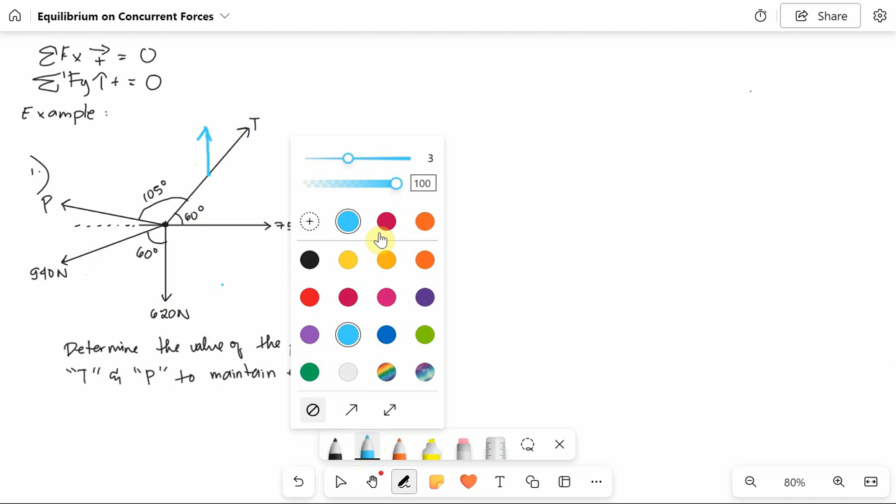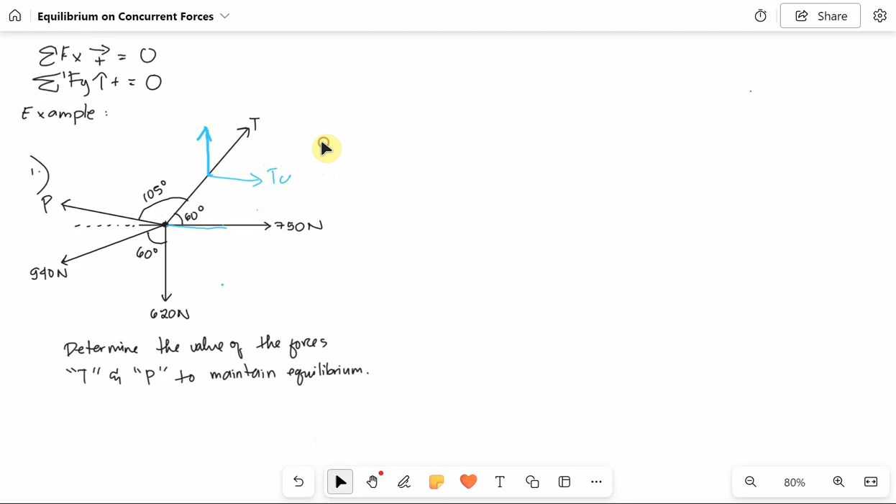So pwede nating kunin yung y component and x component ni T. So ang x component niya, ito yan, andito, adjacent side ni 60, kaya cosine 60, T cosine 60. And then ang vertical component niya dito, so opposite na 60, so T sine 60.

Okay, the next, yung P. Walang direktang given na angle sa P dito. Pero meron tayong given na angle na 105 and 60.

Kung knowing the total angle nito hanggang dito, that is 180 degrees straight line. And pag pinag-plus mo, 105 plus 60, that is 165. So ang total nito ay 165. And then ang remaining angle, kung 165, 180 minus 165, that is 15 degrees. So may 15 degrees tayo dito.

So pwede na natin kunin si y component and x component ni P. Ang y component ay opposite ni 15, so that is P sine 15. And then ito ang horizontal component ay adjacent side ni 15, so P cosine 15. And then last diagonal force, 940.

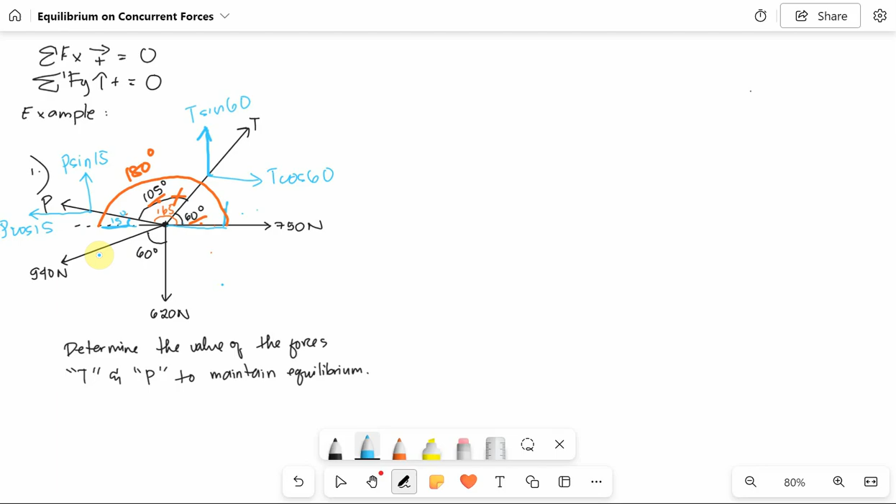So meron ulit tong y component and x component. Ang given sa kanya 60. Pero pwede mo rin makuha itong angle na to, which is 60. Ang total angle nito ay 90 degree, so 90 minus 60, that is 30. So any of the two reference, pwede nyong gamitin.

Pero this time, yung 60 na lang. So itong vertical component sa 60, ito yon, katabi niya, so cosine 60 yung vertical component, kung 60 yung reference natin. So 940 cosine 60. Kung yung 30 degrees naman yung ginawa natin, yung y component dito, opposite sa 30.

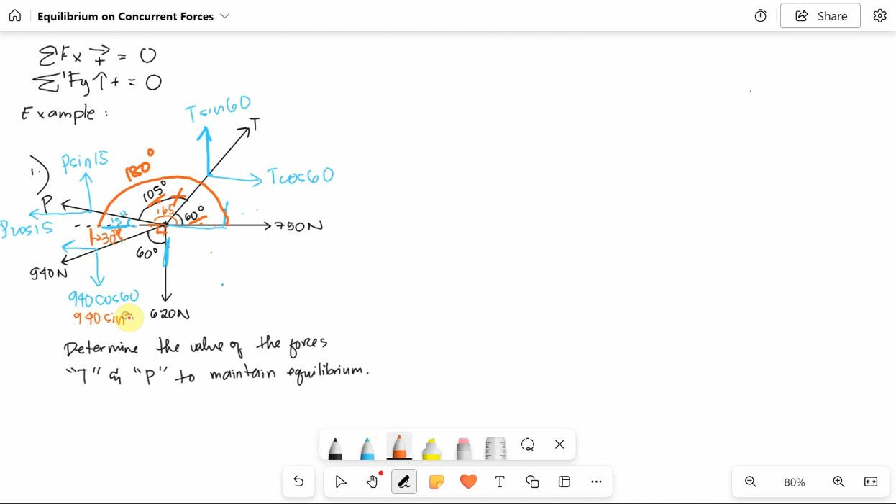So sine. Pwede mong gamitin 940 sine 30. So either of the two, pwede mo siyang gamitin. Pareha pa rin naman yung magiging sagot niyan.

So ito din, ang horizontal component ni 940 ay opposite ni 60. So ito yan, opposite ni 60. So 940 sine 60.

At again, kung gusto mong gamitin yung 30, adjacent side siya ni 30. Dito naman yung 30. Pwede ring 940 cosine 30, adjacent. So either of the two, pwede gamitin. So stick na lang tayo dun sa blue.

Okay, ayan. So ngayon, alam na natin mga component. Ang gagawin natin, ano na yan, summation na tayo. Mag-summation na tayo ng forces along x or along y. Depende sa inyo kung anong uunahin nyo. So unahin natin summation of forces along x.

We're going to the right is positive, is equal to 0. To maintain equilibrium, 0 dapat yan.

So unang summation of x, T cosine 60. Again, going to the right is positive, pag going to the left, negative. P cosine 15 minus P cosine 15. And then 940 sine 60 ay going to the left, that is negative 940 sine 60. And then meron pa isa.

Itong 750, again, walang component yan kasi nasa horizontal axis na yan. So horizontally na yan, going to the right, positive. And then 1, 2, 3, 4. Apat lang na going to x component. So yan na yun, equals to 0.

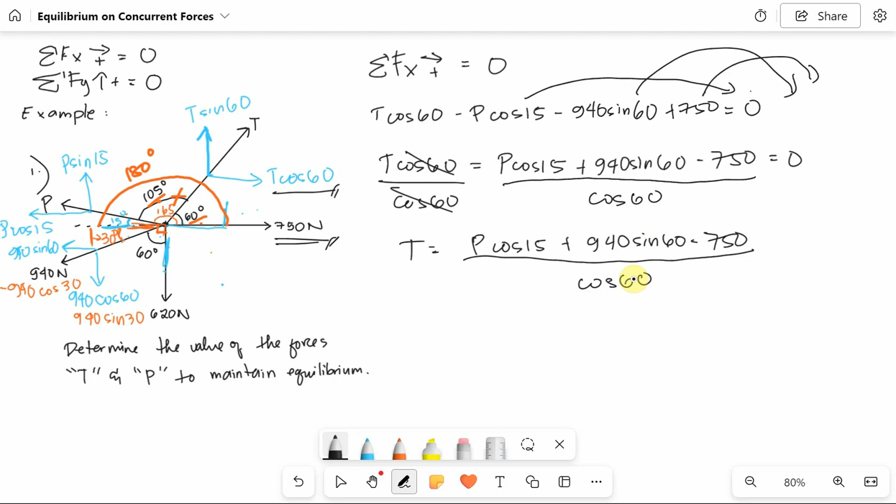Kasi nga, kukunin natin yung T. Now, T will be P cosine 15 plus 940 sine 60 minus 750, all over cosine 60. So kung gusto nyo i-simplify ito, pwede naman. O pwede natin i-store yan, sa calculator kung alam niyo i-store, para hindi mawala yung lahat ng value. So paano ba mag-store? So solve lang natin to.

940 sine 60 minus 750. That's the answer, right? 64.0638. So, do you want to store that?

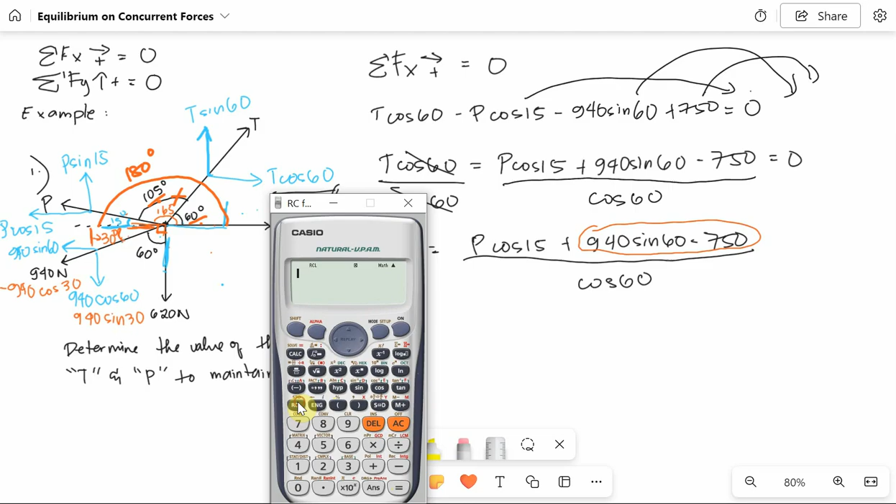So T, just to shorten the equation, no? P cosine 15 plus A - that's A, which we stored - over cosine 60.

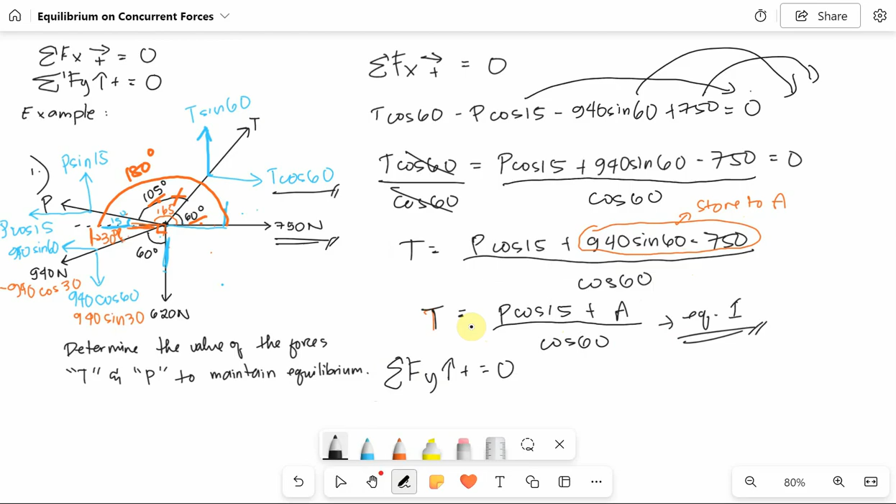Okay, next, summation of Y. So this is T sine 60, positive. T sine 60, then P sine 15, positive too, going up. P sine 15, going down, 940 cosine 60, that's minus. 940 cosine 60, and then 620, going down, minus 620 Newtons, equals 0.

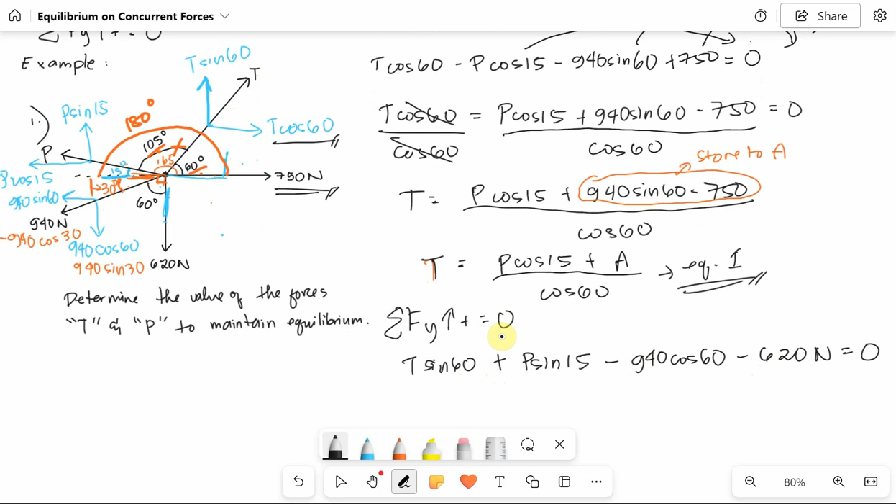And from this one, this is our equation 2. Equation 2. We can substitute equation 1 into equation 2.

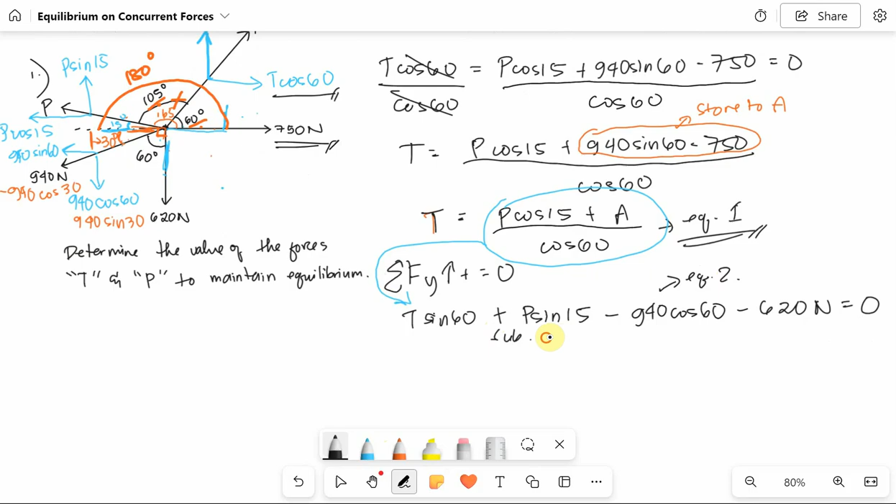So the whole T, we'll substitute here. There. Okay, so let's substitute there. Substitute equation 1 into equation 2.

So T is P cosine 15 plus A all over cosine 60, times - don't forget this, okay - times sine 60, plus this, P sine 15.

Then let's transpose these constants. So it equals, positive na siya - 940 cosine 60, then plus 620. Okay, and then can we factor out P here in the equation?

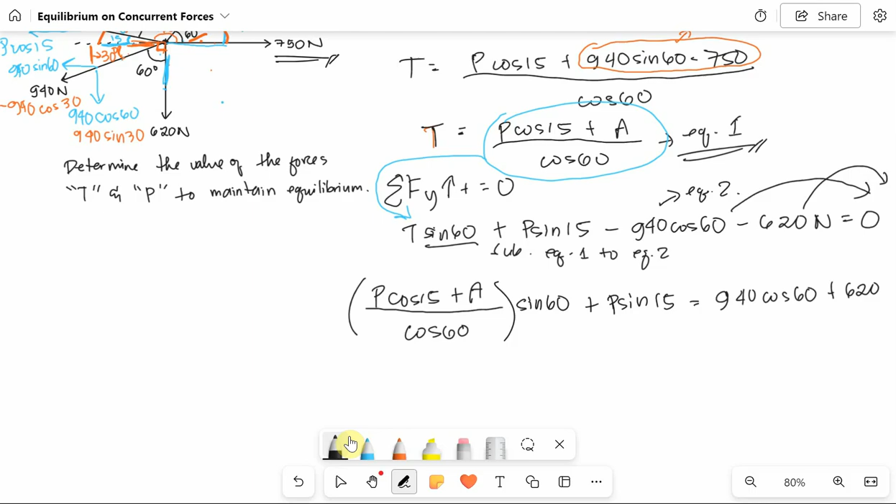change it first. We can distribute the sine 60. So P cosine 15 sine 60 plus A sine 60, all over cosine 60, plus P sine 15 equals 940 cosine 60 plus 620.

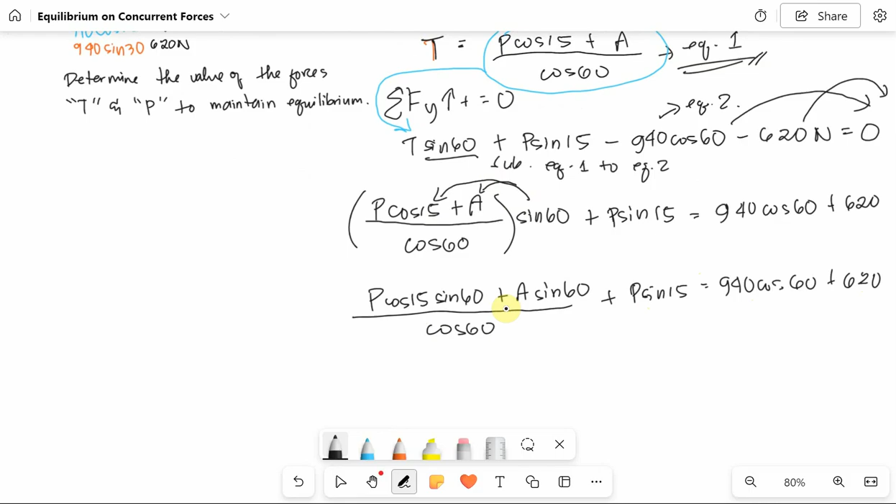Again, we still can't factor it out. What we'll do is evaluate these two fractions separately, so it becomes P cosine 15 sine 60 all over cosine 60, plus A sine 60 all over cosine 60.

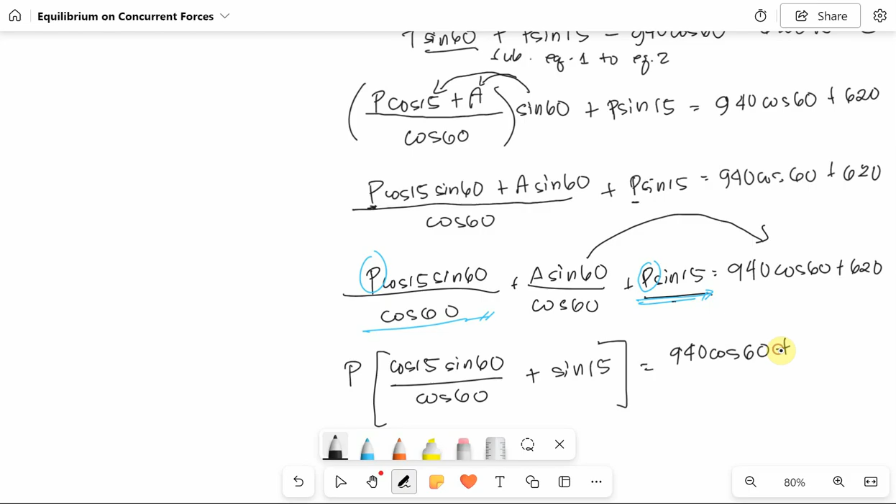Equals 940 cosine 60 plus 620, minus this - we transposed this - minus A sine 60 all over cosine 60.

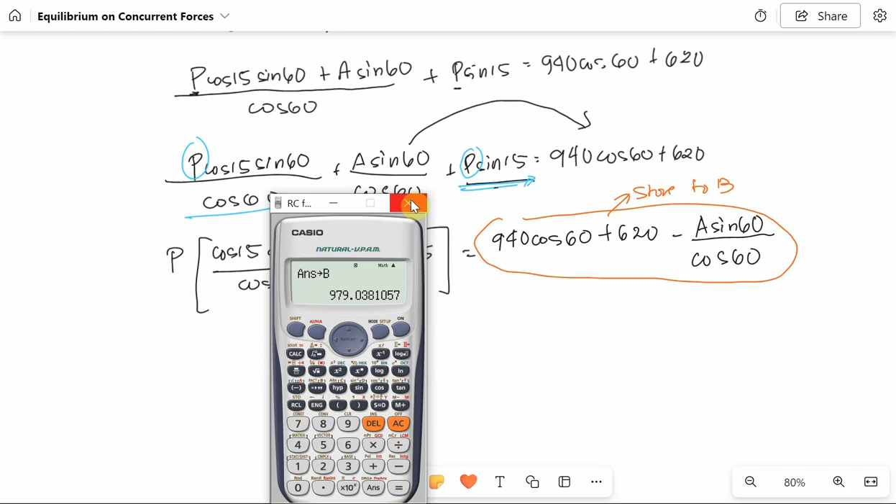So now for B, that's letter B. So divide both sides by this one to get P, right? So P will be equal to B.

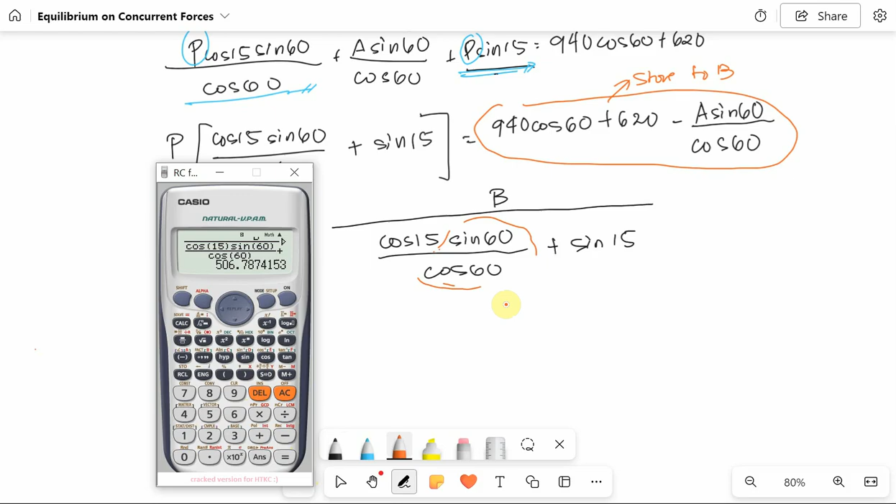506.7874. Tama ba? Yan, tama. So, ito na yung force P. Again, ang unit natin dito ay Newton naman lahat. So, Newton na rin ang unit natin ni force P.

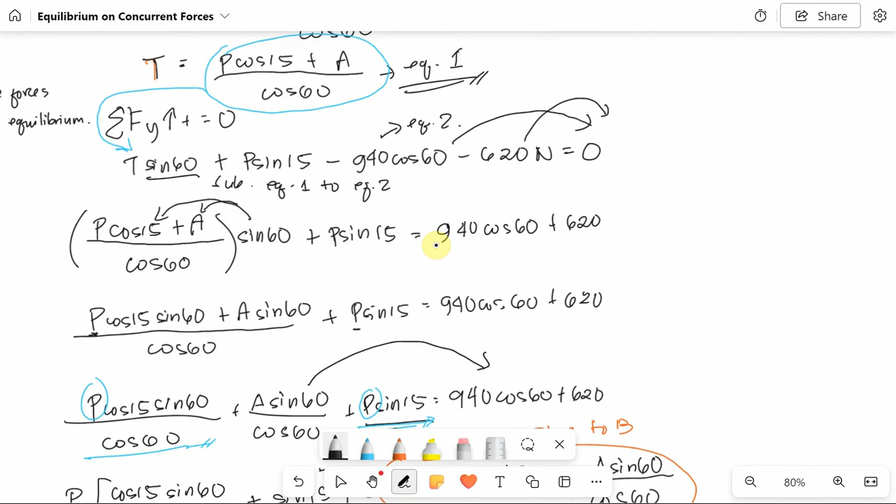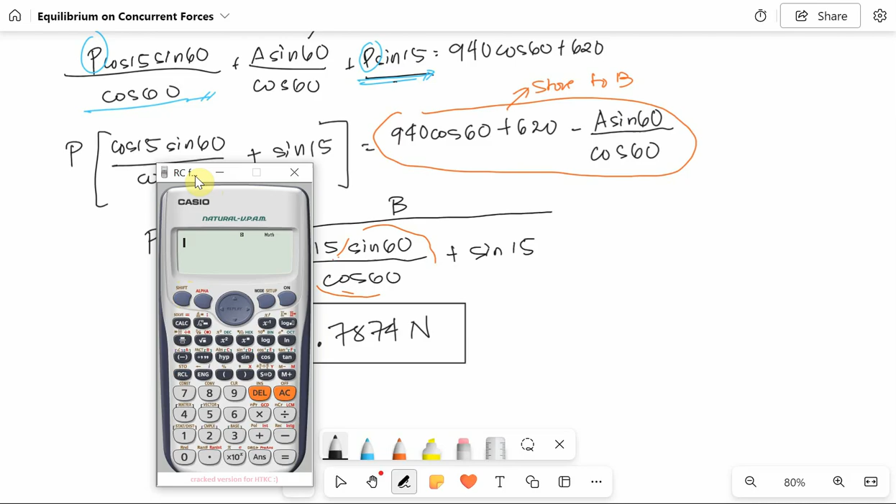Yan. Okay? Next, kailangan natin malaman si T. Knowing P, pwede rin natin i-store yan sa C, kasi isa-substitute natin. Store to C, A, B, C. Kasi kailangan natin yan, si P, para ma-solve si T.

Okay, so to solve T, using ito, formula natin, no? Cosine 15 plus A over cosine 60. Ito. Okay? So si P, in-store natin sa C. Cosine 15 plus A over cosine 60.

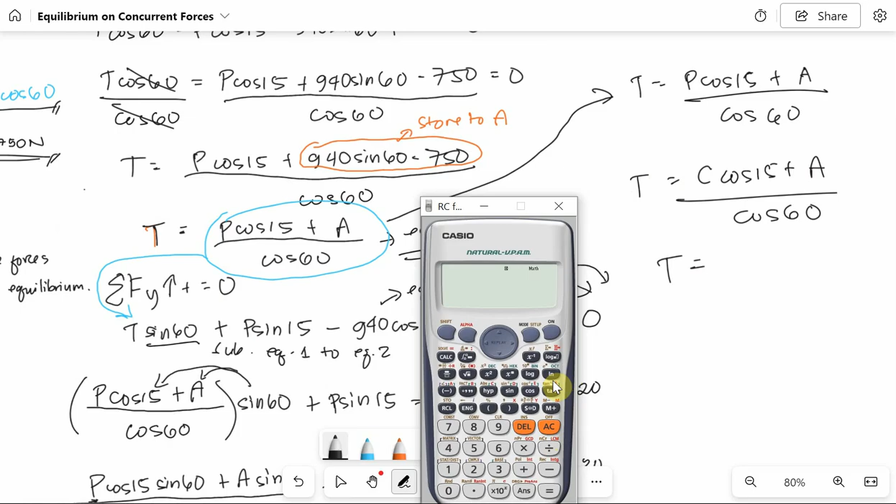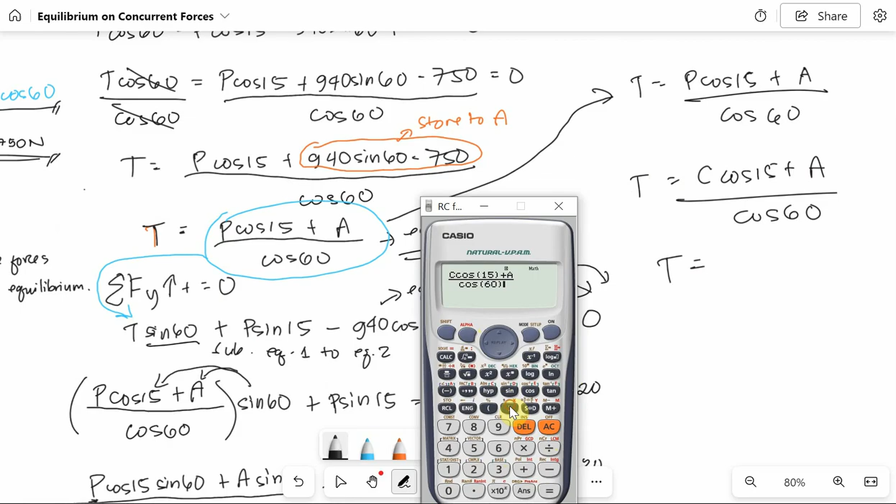So T will be, mas madaling buhay, no, kung na-i-store na. So sigurado ka pang tama. Again, kailangan lang din sigurado yung tama yung in-store mo sa calculator, no. C cosine 15 plus alpha A all over cosine 60. That would give us 1107.165859, or 1107.1659 Newton. Okay? Ayan.

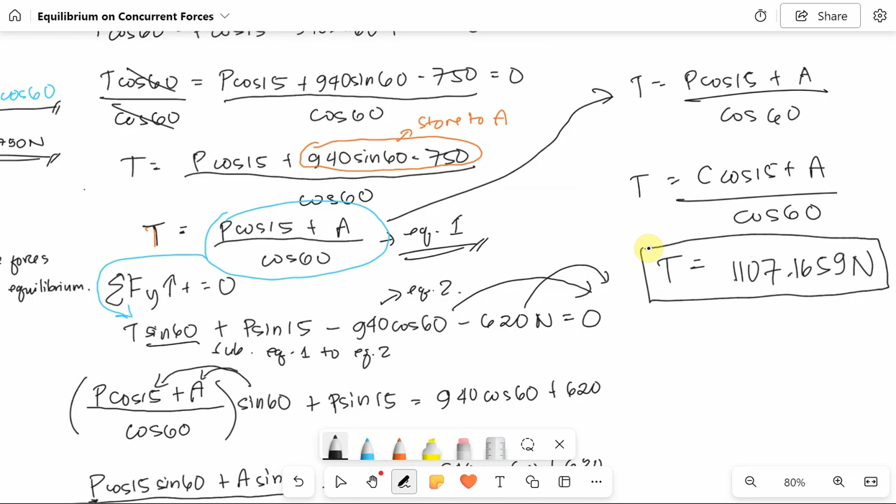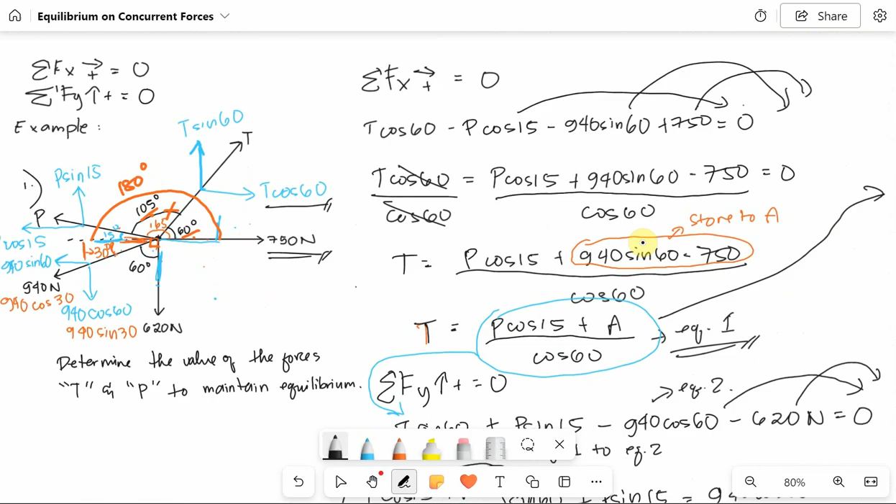Ayan. Ang tanong naman dito sa number 2, determine the force in each member and the weight, yung W na weight na to, of the block to hold the position shown. So meron tayo ditong tension, no? May ropes yan, ibig sabihin imagine nyo lang ropes yan. Tapos nakakonect siya dyan. So may 60 degrees, 30 degrees, 30 degrees, and A, B, C, D. Ito, 4 kilogram and the weight. Okay? So determine the force on each member.

Ano yung force on each member? Ito yan, member AB. So ito yung AB. Hindi natin alam. BC, hindi rin natin alam. And then CD, and then the weight. Okay? So again, concurrent force to, no?

Kung titignan nyo, merong dalawang concurrent force dyan. Kung hahatiin natin to, ito yung left side, section 1 sabihin natin, right side is section 2. So magdodrawing tayong FBD dito, which is ito yung concurrent na origin, no? Ito yung force, di ba? So that is a concurrent force sa section 1, and concurrent force din sa section 2, sa point C, force, di ba? So may tatlong force na nag-intersect sa isang origin. Okay? So paano natin sisimulan to, no?

Kung sa section 1 ba tayo o sa section 2? Dito sa section 2, yung weight hindi given, hindi natin alam. Sa CD, hindi rin natin alam. Si BC, hindi rin natin alam.

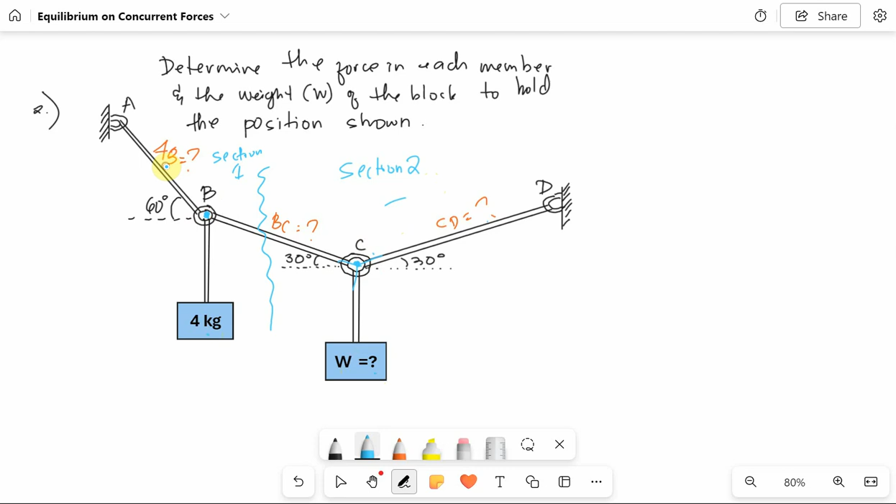Punta tayo sa section 1. Sa section 1, may given na 4 kg. Tapos hindi natin alam si AB, hindi natin alam si BC. So at least dito sa section 1, merong isang given, no? So mas maganda magsimula, syempre, sa may given kaysa sa tatlong wala kang given. Paano mo masosolve agad yun, no? Wala kang masosolve agad. So dito, dahil may given, pwede natin masolve agad. May masosolve tayo agad dito sa section 1.

Okay? Pero notice the weight, the given is 4 kg. So normally, ang weight or the force unit is in Newton. So ang gagawin natin, itong 4 kg, times natin sa 9.81, gravitational acceleration, para magkaroon ng weight. So pwede naman 4 times 9.81. Sa ilan ba yan? 4 times 9.81, that is 39.24.

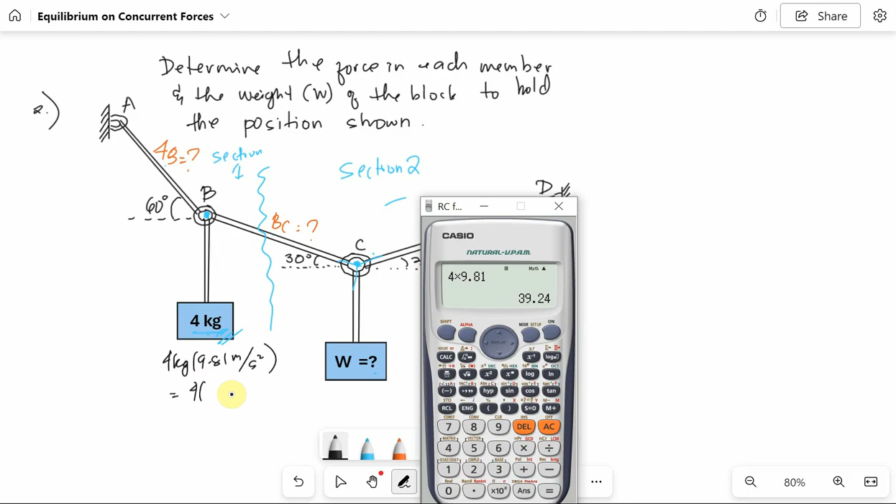39.24 Newton. So may Newton dito, no? So ito na yung force nito, yung pababa. Hindi 4 kg yung gagamitin natin, times pa natin sa gravitational acceleration. So knowing that, pwede tayo mag-free body diagram at section 1.

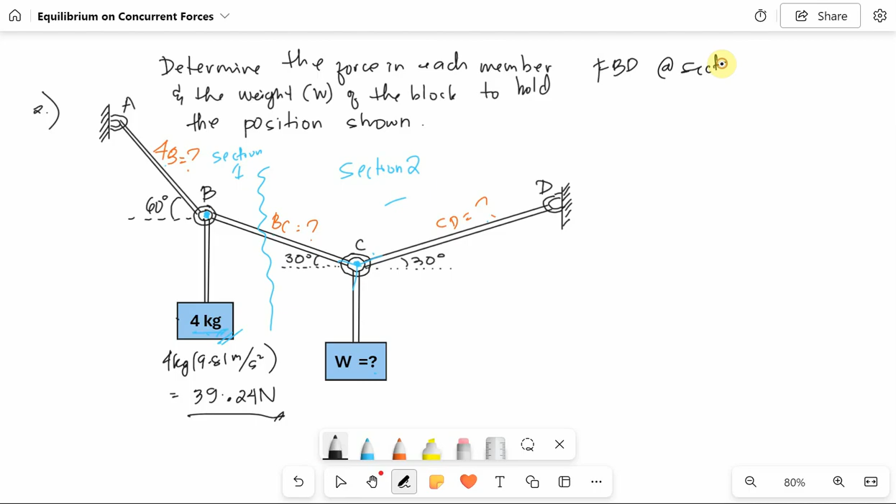Okay? So meron tayong point B. Ito pala, no? Tapos meron na tayo ditong force na 39.24 Newton. Ito ay BC, so tension, pahatak siya, no? Yan, BC. Tapos meron tayo ditong angle na 30 degrees. And then meron tayong AB na pahatak din, pataas, AB na meron namang angle na 60. Okay? So concurrent forces na siya.

So ang gagawin natin ulit, kukunin natin ulit yung component ni AB tsaka ni CB. Again, si 39.24, diretso lang naman siya, vertically, so wala siyang component. So si BC, pababa, isang pakanan, isang pababa. So yung Y component ni BC ay opposite ni 30, so that is sine, BC sine 30. And then yung X component, is adjacent side ni 30, so BC cosine 30.

And AB opposite ni 60 si y, dito, katapat. So sine AB sine 60, and then itong force na to ay ito, adjacent side. So AB cosine 60. Okay, and then ang gagawin na natin, so mag-summation na tayo ng forces along x or along y.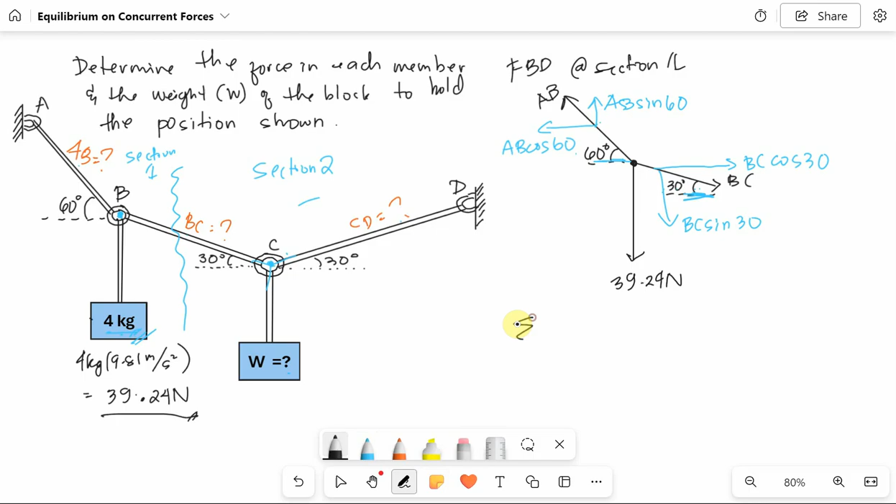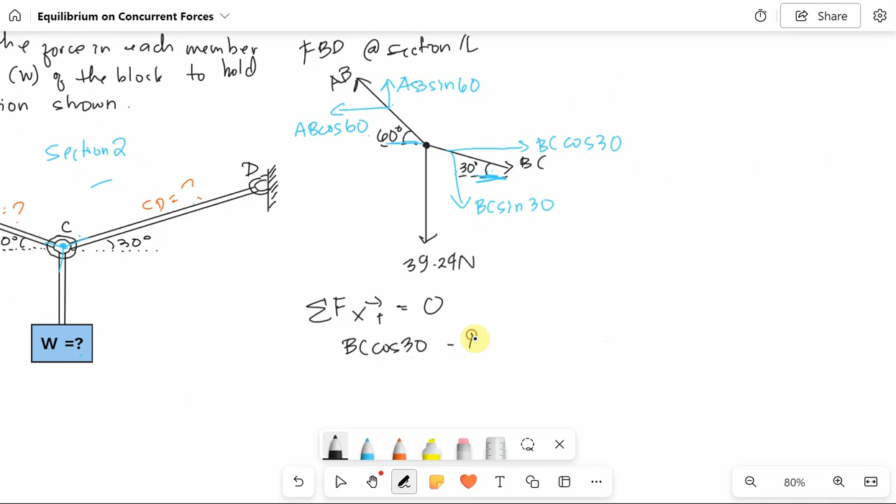Depende sa inyo kung anong unahin nyo. So along x, inunan natin yun kasi dalawa lang naman yung force sa x, no? So BC cosine 30, positive, negative AB minus AB cosine 60 equals 0. So dalawa lang, tatranspose lang natin yan. So BC cosine 30 equals AB cosine 60.

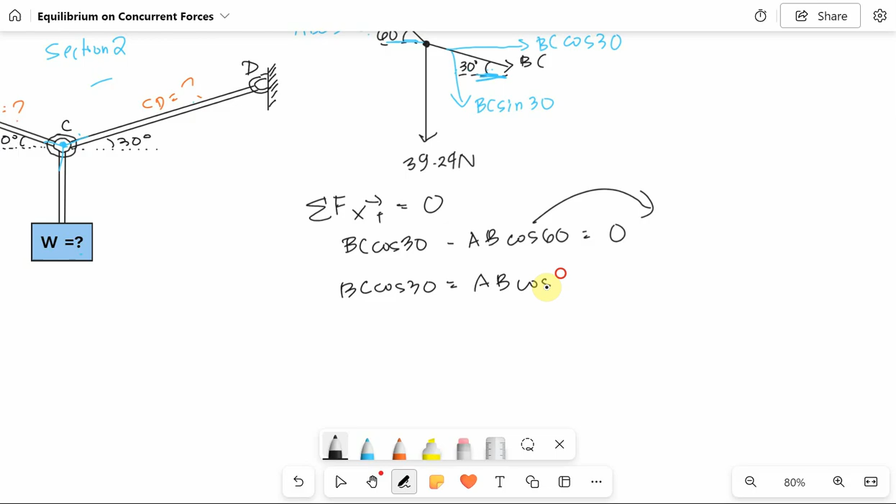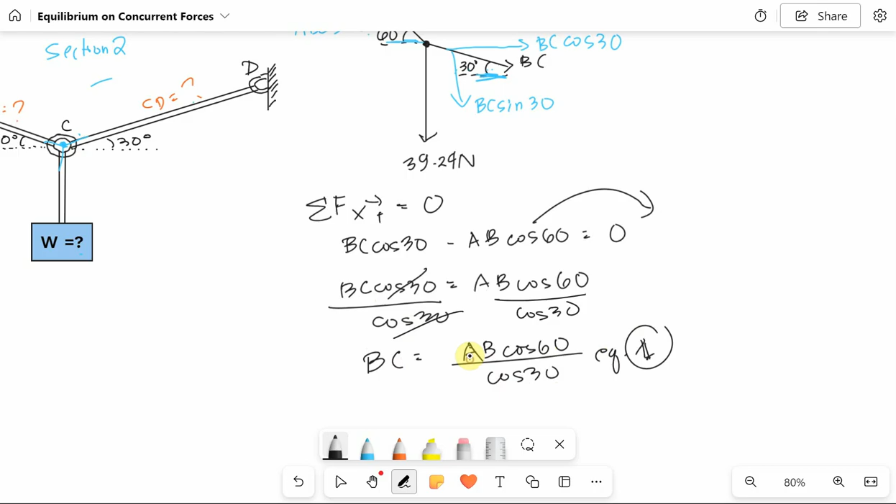And divide both sides by cosine 30 para makakuha tayo ng first equation, AB cosine 60 over cosine 30. This is the first equation, equation 1. So again, pag may dalawa kang unknown, kailangan dalawa din yung equation na magagawa mo, no? Which is yung summation of x tsaka summation of y.

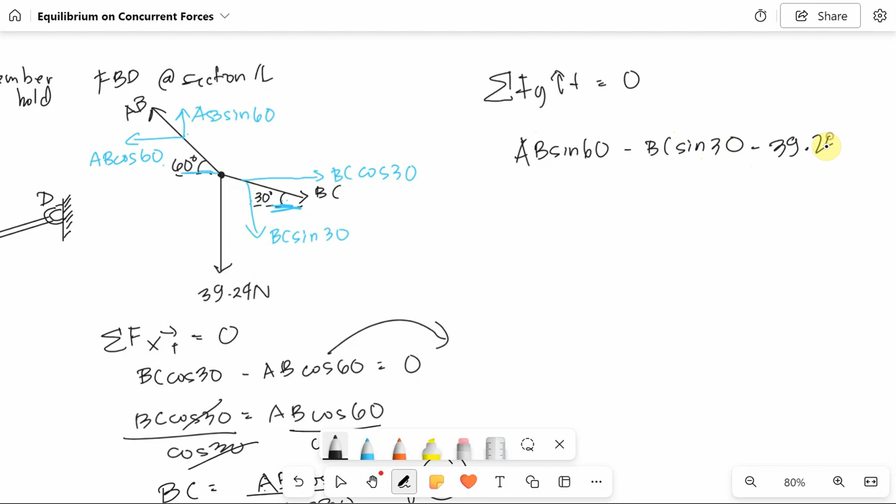So mag-summation naman tayo ng forces along y. Upward is positive. Upward dito, AB sine 60, pababa BC minus BC sine 30, and then meron tayong pababa, negative 39.24 Newton is equal to 0. Okay, so ito na yung equation 2 mo.

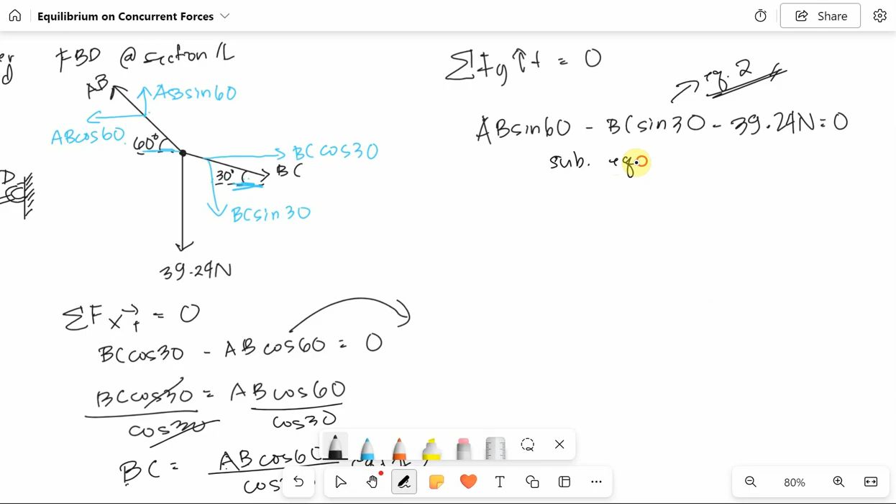Equation 2 natin. So dahil alam na natin si BC, pwede natin i-substitute. Substitute equation 1 to equation 2. So BC, ito, BC yung isa-substitute natin dito. So isa-substitute natin, ilalagay natin sa BC. So as is tong AB, AB sine 60 minus BC.

Ang BC ay ito, no? AB cosine 60 all over cosine 30. Again, wag niyo kalimutan ito nakadikit sa BC, that is sine 30. Tapos transpose natin to.

39.24 Newton. And this time, there's no plus attached to AB here, unlike our first example. So we can factor out AB.

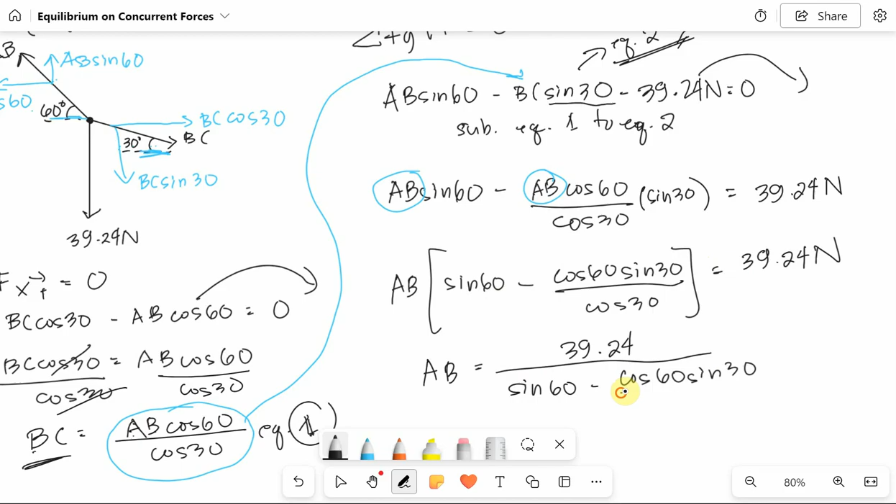AB will be, what remains is sine 60 minus cosine 60 sine 30, cosine 60 sine 30 all over cosine 30, equals 39.24 Newton. Then divide both sides by this factor to get AB. So it's 39.24 all over sine 60 minus cosine 60 sine 30 all over cosine 30. There, now calculate.

We don't need to store anything since these are just sine and cosine values, it's simple. 39.24 all over sine 60 minus cosine 60 sine 30. Again, you can also write this as cosine 60 times tangent 30, since sine over cosine is tangent. The answer will be the same either way. So AB will be 67.9657.

67.9657. Our unit is Newton. AB is in Newton. Okay.

So since we'll use AB to solve for BC, we can store it. Our final answer earlier is 67.9657, shift, store to A. So I stored it in A. Again, make sure your AB is correct.

To solve for BC, which is this whole thing, BC will be equal to AB stored in A, cosine 60 over cosine 30. So BC will be equal to alpha A, cosine 60 over cosine 30. So that would be, here's the answer.

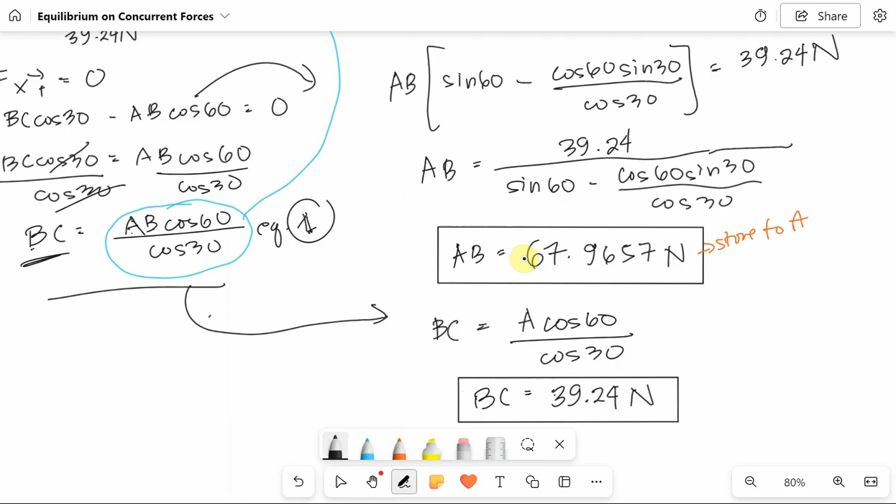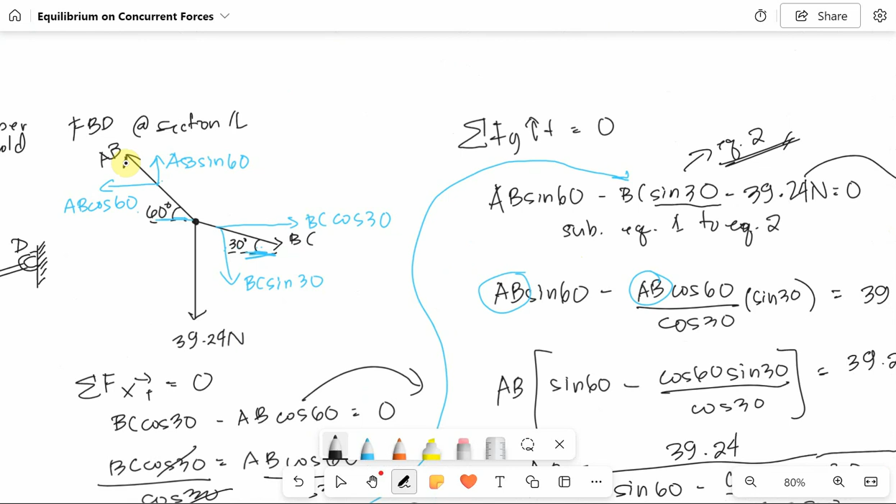So we've now gotten the components in section 1, A and B, AB and BC, we now know. So we can proceed to section 2.

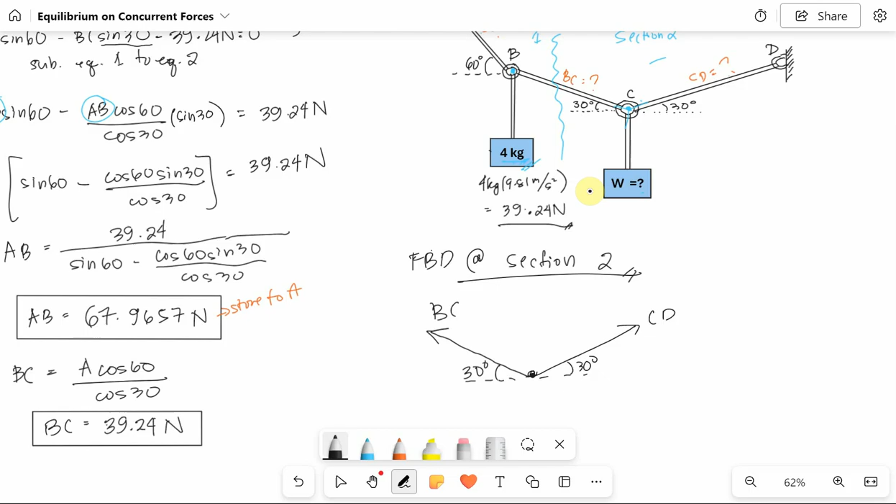But first, we need to add the components. So this is the adjacent side, so CD cosine 30 and CD sine 30. And this one is opposite, Y. So BC is sine 30 and BC cosine 30.

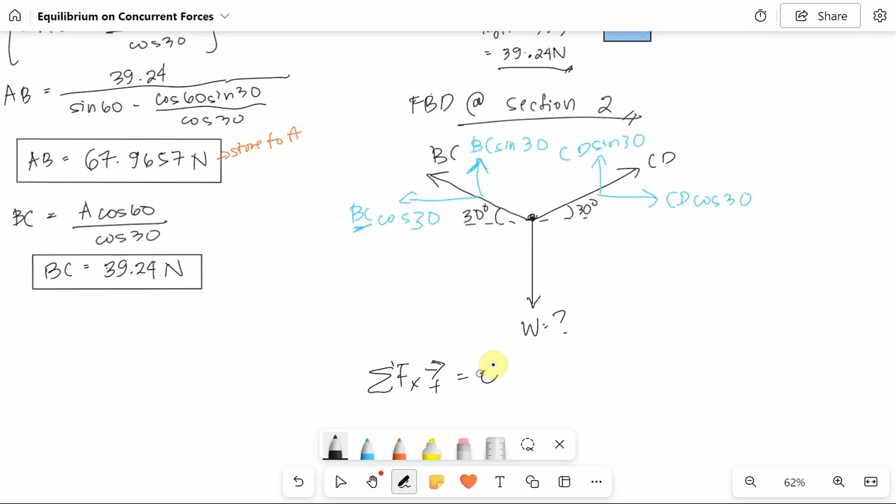So here, there's only X and BC is given, so we can solve CD right away. Summation of forces along X, going to the right is positive, equals 0. Going to the right, CD cosine 30 minus BC cosine 30 equals 0. When we transpose that, CD cosine 30 is equal to BC cosine 30.

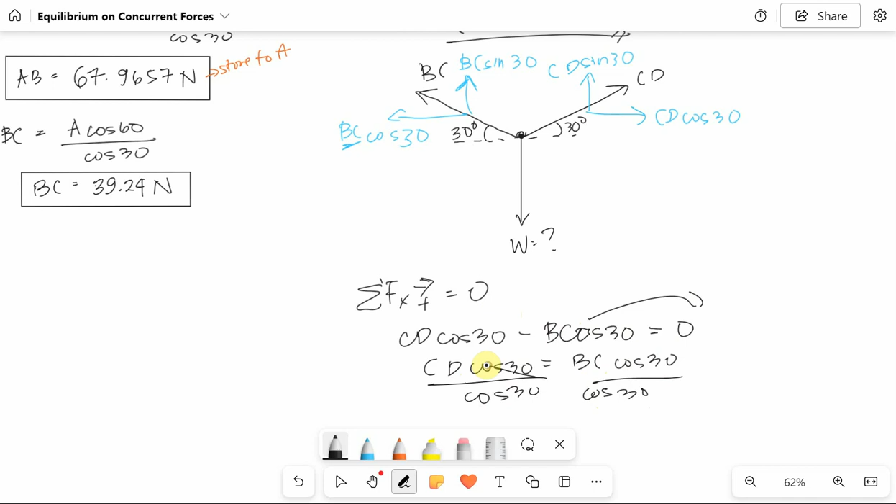So if you divide both sides by cosine 30, they cancel out, meaning CD is equal to BC, which is 39.24. Again, if you're wrong in BC, this CD will also be wrong.

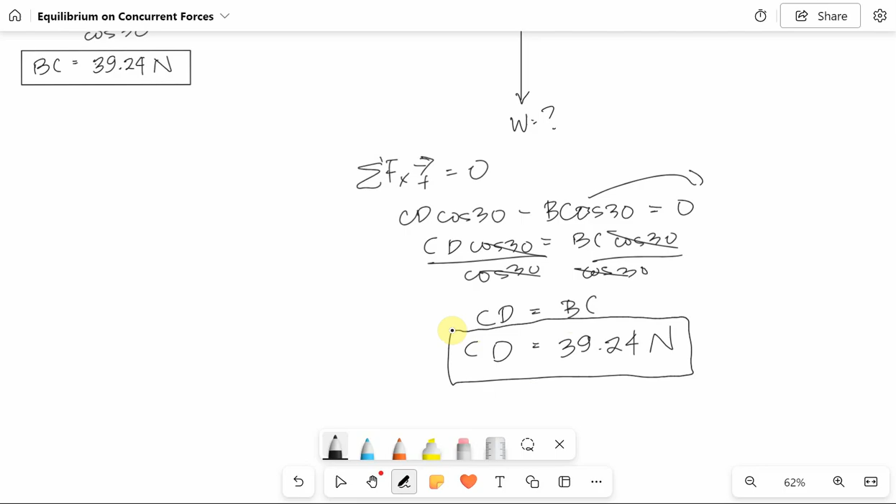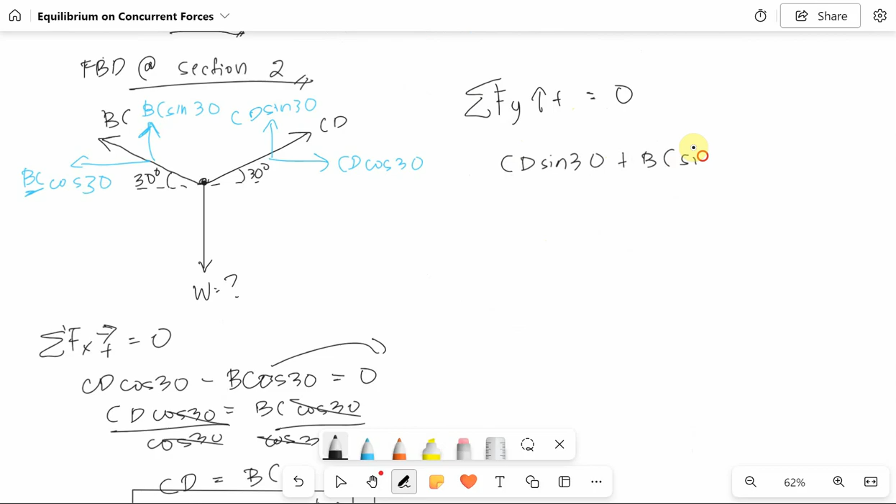Okay, and then once you're done with summation of X, we do summation of Y. Summation of forces along Y, going up is positive. CD sine 30, BC is also going up, plus BC sine 30, and going down is W, minus W equals 0.

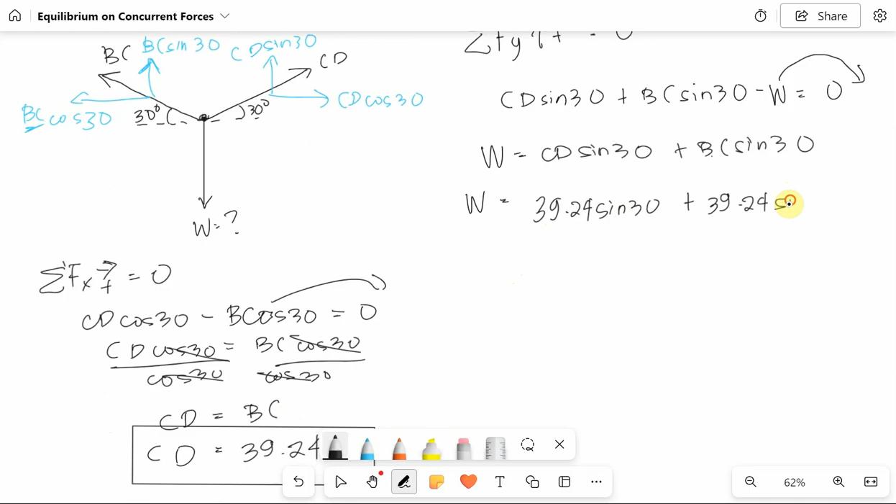So I'll just transpose this and mirror the equation. So W will be CD sine 30 plus BC sine 30. And CD is equal to BC, which is 39.24. So 39.24 sine 30 plus, they're the same, 39.24 sine 30, so it's like multiplying this by 2.

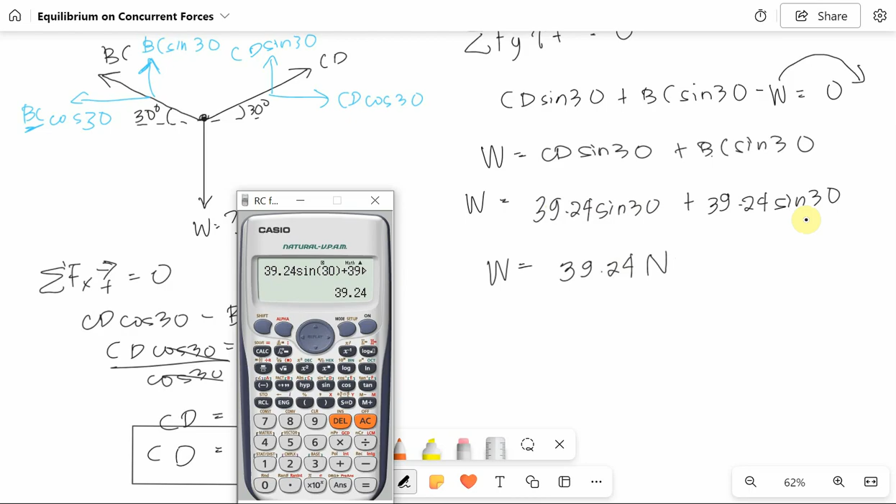39.24 sine 30 times 2, or let's just write it out, 39.24 sine 30. So that would give us, same thing, 39.24 Newton. Okay, because sine 30 is 1/2, so half of 39.24 plus half of 39.24 becomes 39.24 again. Okay, there.

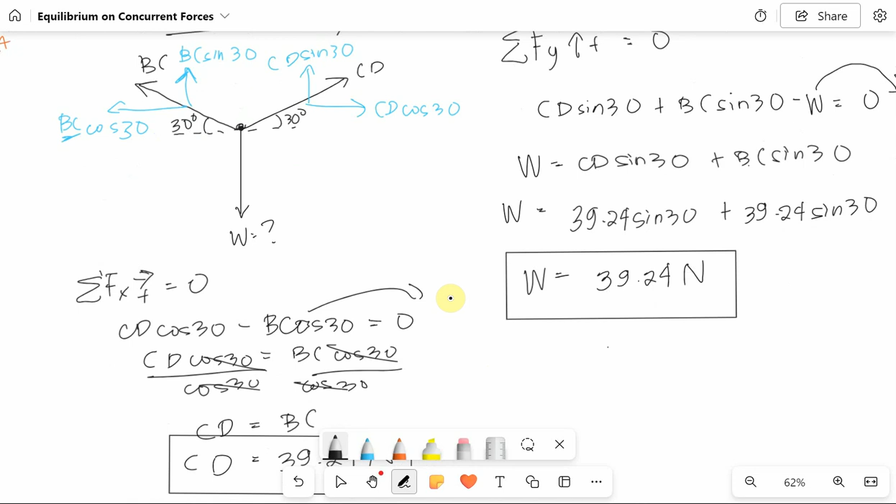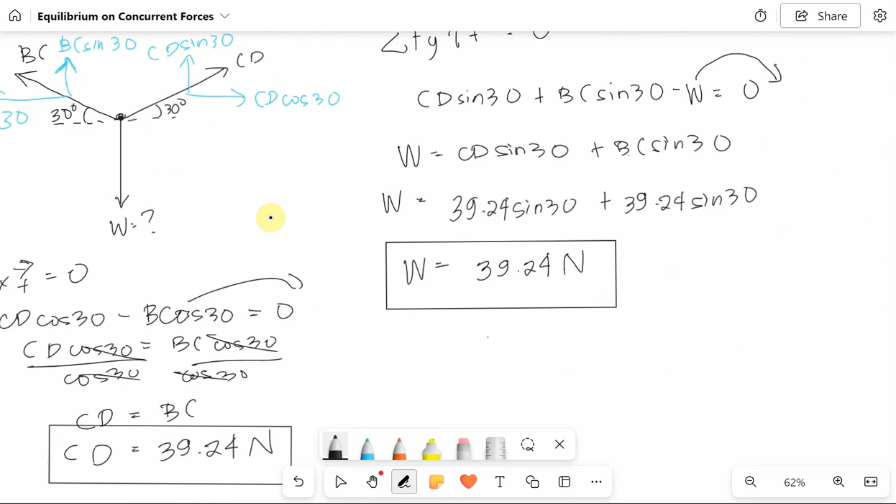Okay, so try to answer this one on your own. We already know the answer, for practice, to familiarize yourself with the process of solving equilibrium of concurrent forces. And again, you can find example problems in books. You can try them yourself for some challenge. Okay, so thank you and good luck on your examinations.